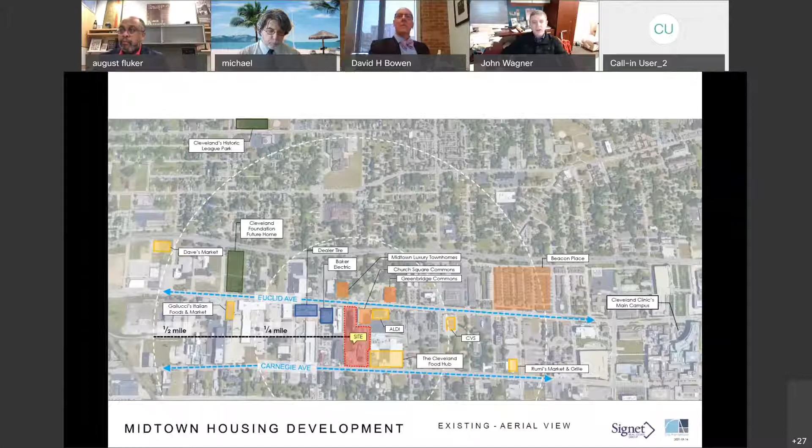This is an overall aerial. You'll see the site highlighted in red. There's a lot of great new stuff going on in Midtown, including the future home of the Cleveland Foundation. This site is located just east of Dick Pace's Baker Electric, and to the west of the Pearl Development Church Square Commons.

Here's an aerial of the site. On your right is Euclid Avenue. On the upper left is Carnegie.

Here you see the boundary of the site defined, as well as the 5 buildings that we are looking to demolish. I'm going to go through each one individually, but more focused on the Sullivan house, which is up on Euclid Avenue. I'd like to take a moment to talk about its siting and its relationship to Euclid. It's sort of awkwardly located in this missing tooth between Church Square Commons and Iron Mountain, which is the large complex just to the west of it, sitting in a sea of rubbled concrete.

At the request of Michael, we put together a quick diagram showing each of the buildings and the properties they're located on, just for purposes of your motions, so you can see which. There are numerous properties that will be consolidated in the future, but currently some of those buildings sit on 2 to 3 parcels.

So the Sullivan house, there is a group of folks that would like to save it. It is a historic home, and we feel strongly that while it does have intrinsic value, the site is better utilized based on the development plan we've come up with. We are not asking to demolish the Sullivan house today. We have spoken with Carl from Landmarks, with Jamie DeRosa, as well as some neighborhood stakeholders including Midtown, who are working currently on a plan to relocate the house.

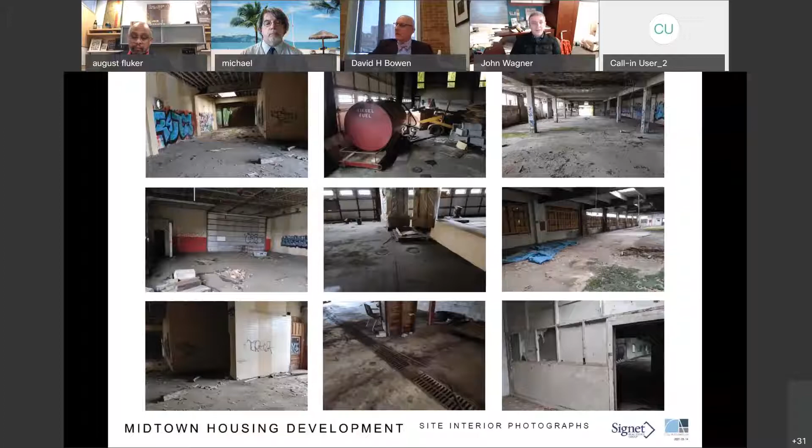Next slide shows the interior of those, very typical warehouse buildings, concrete slabs, steel and concrete frames, nothing of note in there other than a lot of dirt, debris, and unsafe conditions.

Next slide, please. So now we're going to talk about the redevelopment. The site is just under 6 acres. Again, Euclid Avenue is on the right, Carnegie Avenue is on the left.

At the top of the property is the Iron Mountain facility. And then on the lower portion, which would be to the east, we have the Church Square residence, as well as the Cleveland Food Hub and Aldi's. Next slide, please.

So the redevelopment looks to take advantage of this large property and the potential connections between Euclid Avenue and Carnegie. We are looking at a residential development in a two-phase approach. The first phase would be the buildings on the right, which are labeled buildings 1, 2, and 3. They amount to 160 residential units.

From a site and design standpoint, we felt it's important to line Euclid Avenue in that area of blue, which is residential amenity space, including fitness rooms, leasing, common lounge areas, as well as some actual leasable retail space right at the corner. The main design move we put in was a new street.

There is no connection north-south between 71st and 77th. We felt this was a great opportunity to create a new connection. This will be a private street, but it will be designed and function much like a public street with on-street parking, sidewalks, street trees, including an internal green space for the residents and a park-like setting. We have brought the buildings up to the street edge and tucked all of the parking behind.

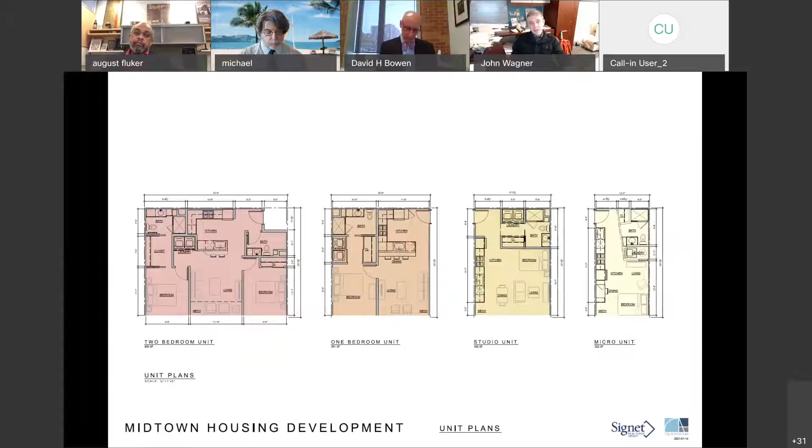They are put together in a series of 3-story walk-ups, with front doors on the street as well as access to parking from the rear. Each stair, or pod as we call it, will have 12 units. So you will get to know your neighbors really well, since 12 people share an entrance, sort of a neighborhood within the neighborhood.

As you go up the floor, we eliminate the extra hallway because you're up in the air, and we use that space to create larger units, the 1-bedrooms and 2-bedrooms. Each of those enter out into that single stair.

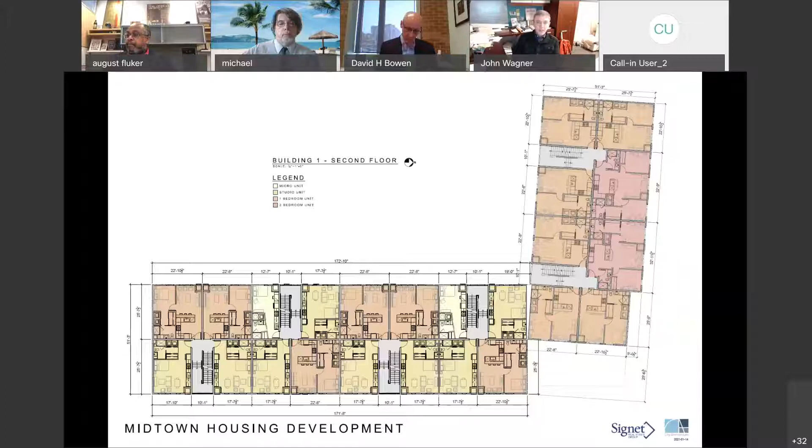From an architectural standpoint, we took a look at that missing type of design that was once very prevalent in Midtown. I'm thinking back to like the Knitting Mills building, the idea of these old warehouse buildings, and tried to incorporate that as well as add a mix of new and modern into the design elements.

So we have the L-shaped building with the retail and amenity space fronting Euclid. As you turn the corner into the new street, you can see the buildings and front doors lining the street with the on-street parking.

Currently we're looking at a mix of materials, and I'll get into those as we get to the elevations and perspectives of the building. There will be some variety between each of the buildings, but what you'll see in the perspectives is all based on the notion of red brick with charcoal. Keep in mind we will be making changes to each building as we develop the design further.

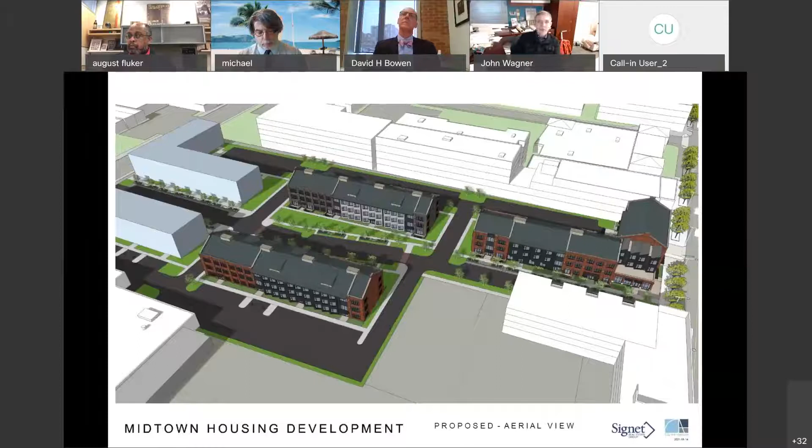And then we started to introduce these more modern elements made out of corrugated metal and larger casement style windows at the corner piece, as well as coming down the street.

We looked at those elements that were prevalent in these warehouses, and tried to be very strict in keeping with that style in the brick areas. We looked at ideas of sawtooth roofs and wanted to incorporate that, but use it in a modern way, which harkens to these townhome-looking pods that sit at the corner, as well as the bay windows.

I realize you guys can't see my mouse moving across the screen as I point to things -- the bay windows that go down the street, tucked under that eave line.

The backs of the buildings currently have the same design characteristics and materials. I bring this up because we are currently going through a budgeting pricing exercise. I always think projects are going to come in on budget, but contractors always tell me they're not. These are areas where we may have to reduce some masonry and introduce more metal, but currently we're looking to keep the design consistent all the way around. More to come when we come back for final design.

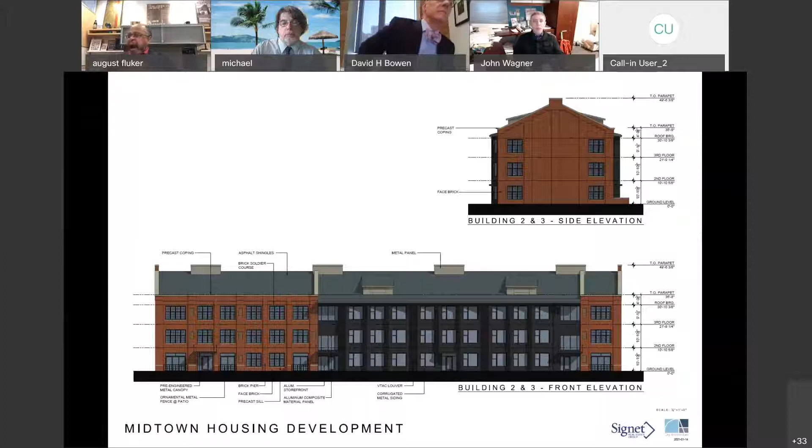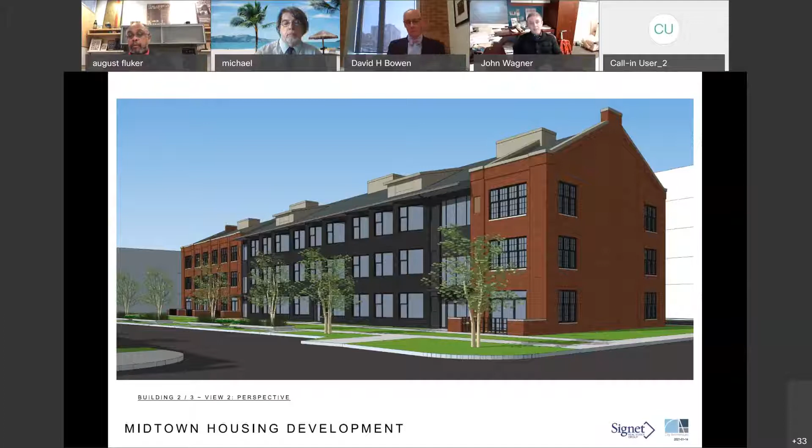The lower image is the area where we would like to cut this new street in. We think this will be a real benefit to the folks who live in Church Square, because they will be getting more landscaping, a tree-lined street, a sidewalk, as well as an animated streetscape right outside their windows. Next slide please.

So these are some images that are befores and afters of the Euclid Avenue frontage. The top one is existing, how it sits today, and the bottom one is the siting of the new proposed development as it would be in the future.

Next slide please. And then I'll stop here. This is the last image. This is again Euclid Avenue looking west at the intersection of Euclid and that new street with the retail and the plaza, and sort of the mix of traditional warehouse and modern architecture.

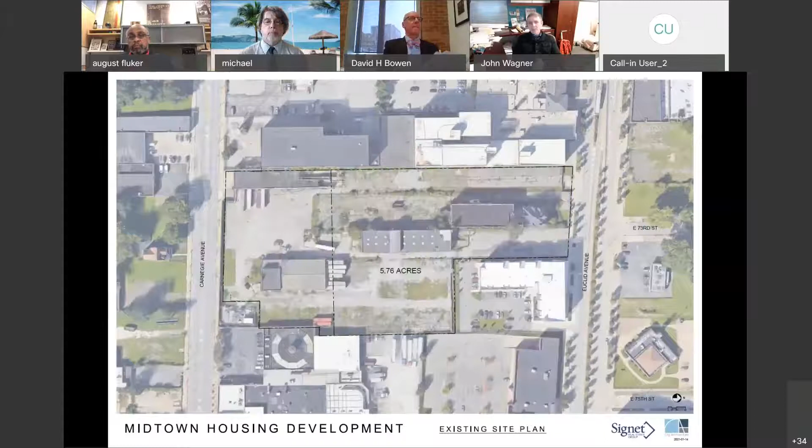Thank you. Hey John, since we got to go take these one by one, if you can go back to the images that show each one of the buildings so you can point out which one we're talking about at the time. Okay, I think the best place to go is the aerial at the beginning, maybe? Because I'm not 100% sure which building sits on which property, or which building is which agenda item. Okay, and I'll use the address and then you can show us which one it is.

Okay. Mr. Chairman, we do have Lillian with her hand raised. Next to the warehouse, and it is 7218 Euclid. So I believe that's the building that's the Alan Sullivan house with the warehouse behind it.

Okay, so it's the former 3-story commercial building. Hey Michael, if that's the Sullivan house, are we just doing the warehouse, or are we doing the commercial building too?

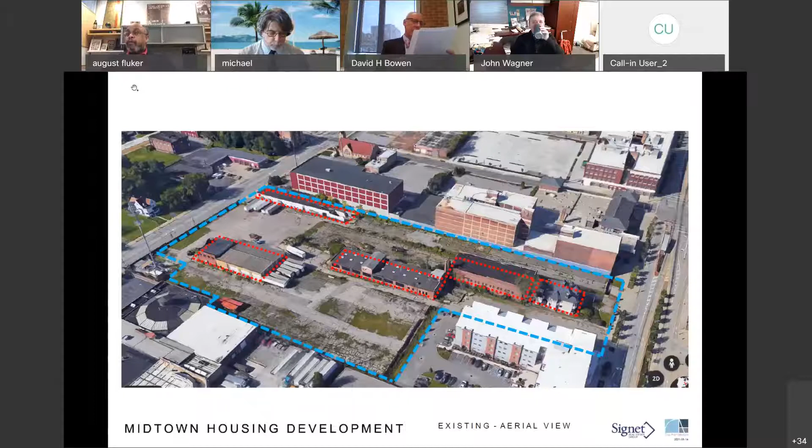I've put a note here on my notes excluding the Alan Sullivan house due to the presentation that Mr. Wagner gave. So I would say it's just the attached warehouse building on item number 1. Okay, so commission members, that would be with stated amendment, understanding it's not including, I guess it's 7218 Euclid, which is the Sullivan house.

So that's what I would look for in approval, excluding the Sullivan house. I move approval excluding the Sullivan house. Lillian has her hand raised, though.

I'll second that. I just - I think the project's great. I actually really like the direction of the architecture a lot. I think it's quite nice. My question is, as you head between here and final approval, for me, I would ask that if it's possible to consider in the site plan and the parking - and I understand since you're doing walk-ups and trying to keep the pricing down on these units for workforce housing, but it is a bit of a sea of parking. So is there a way to possibly work with the sewer district or others to have some partial components of the parking lot be permeable, and to really think about a combination of plaza and parking? Maybe it's not the whole thing for cost purposes.

But since it's garden style amongst parking, it also could potentially feel more like a place than buildings sitting in a parking lot. So I love the project. I just wanted to ask that maybe you do some further consideration of how this large site can also be a place, with thinking about that. And I second the demolition.

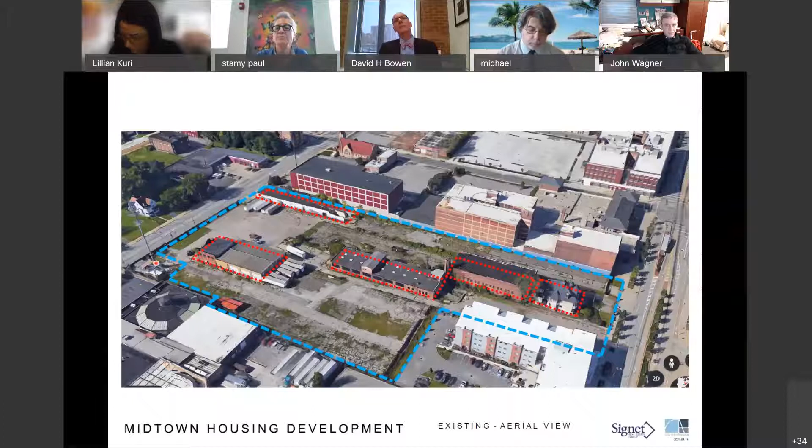Yes, I move approval. Second. We have a motion and a second. Further discussion. Call the roll, please. Bowen, yes. Downing... Diane, yes. Kuri, yes. Paul, yes.

Motion carries. The next one is a proposed demolition of a one-story warehouse building with an attached office area. This is parcel 118-15-014. It's the lower left.

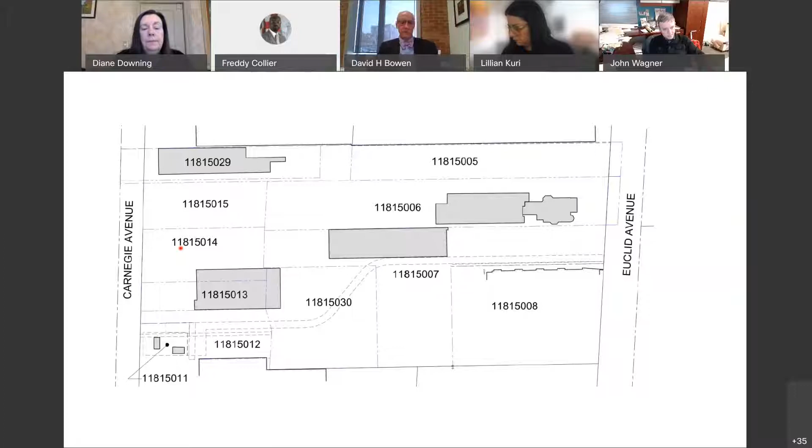Yeah, I move approval. Second. Motion second, further discussion. Call the roll, please. Bowen, yes. Downing, yes. Kuri, yes. Paul, yes.

Motion carries. The next one is the schematic design approval. So this is for schematic.

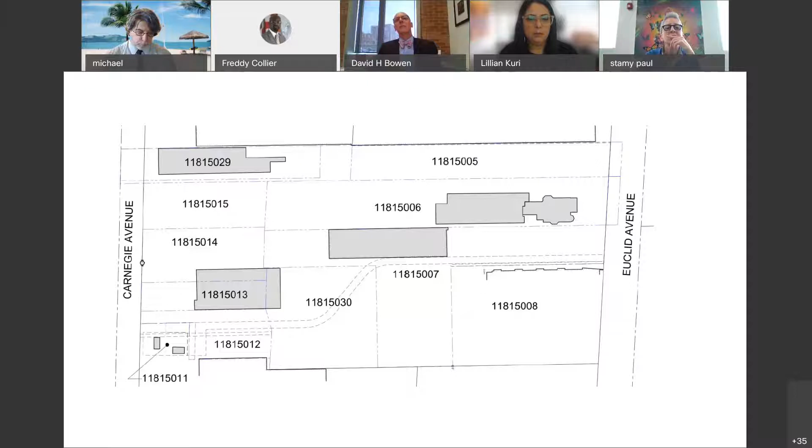I'll move approval, but with my comment that they explore the site plan a little bit from kind of looking at stormwater and different methods for making the parking lot, addressing some of the quantity of asphalt.

Okay, I'll second it, but just want to make sure it continues to exclude the Allen House. Gotcha, thank you. So we have a motion and a second. Further discussion. Call the roll, please. Bowen, yes. Downing, yes. Curry, yes. Stamy, yes.

Motion carries. Lot consolidation, lot split, permanent parcel number 007-07-155. Who's here for this? This is at 3525 Siam Avenue.

Looks like we have Byron from Cleveland Bricks. Byron, are you on the line? Yes, I'm on the line. All right, go ahead, please. Okay, so thank you, commissioners, first of all.

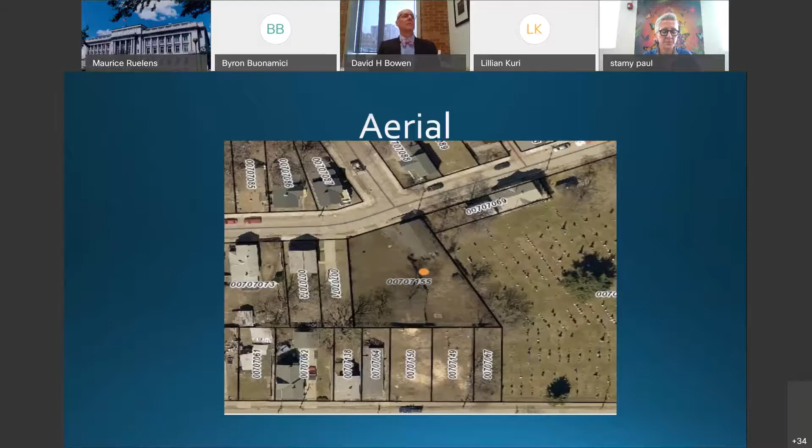We have a parcel, a large parcel next to the cemetery over on the corner of Siam Avenue and Japan Court. Right now it's a rather large lot, as you can see, with a single house on it, kind of tucked up there in the corner that's currently in use. So if we could go to the next slide, I don't know how easy it is for everybody to see that.

Is it possible to zoom in? No, I can't really zoom in easily. I can see it though. Everybody, if you want to zoom in personally, there should be a bar on the left-hand side of your screen that will allow you to zoom in anywhere you want on the screen. Okay.

All right, so it's our proposal for 3 additional houses back there. As you can see on the left, where it says parcel C4, is a north-south facing house with the frontage on Siam. The parcel C3 is kind of a horizontal style house, and C2 is the same style house, just facing a slightly different direction. Our goal is that there's also going to be a single car garage added to the existing house.

They're all going to have access from the same motor court, as you can see there, kind of outlined in the green line. I have a better drawing later in the presentation. I think you can go to the next slide. So this is the design for the rear houses.

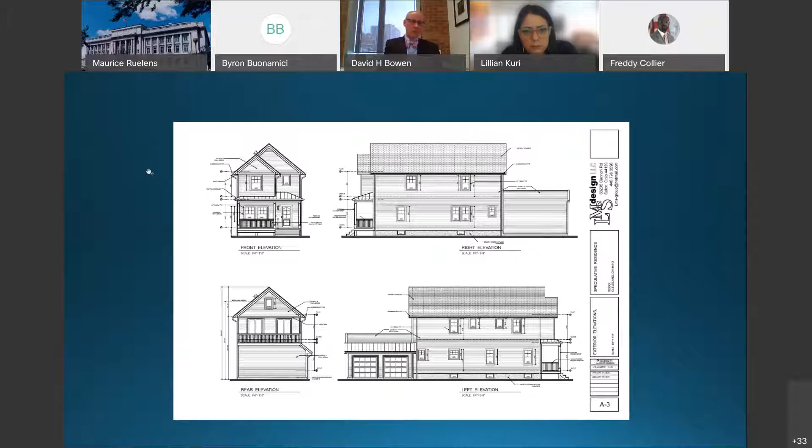This is the frontage of the house that's going to be off of Siam. Pretty basic, I think. Again, it just differs from the others in that the front is the narrow end of the house instead of the wide. You can go to the next slide.

And just more floor plan, and you can go to the next slide, please.

And then those 2 houses will be in the back, and then there are some plans for a little bit of private green space. The layout of the houses was planned so that there is a little bit of green space available. You can go to the next slide.

I mean, it could kind of help, creating some topics for discussion.

I'm sorry, I couldn't hear anything. Somebody was talking to me. I think that was just background chatter.

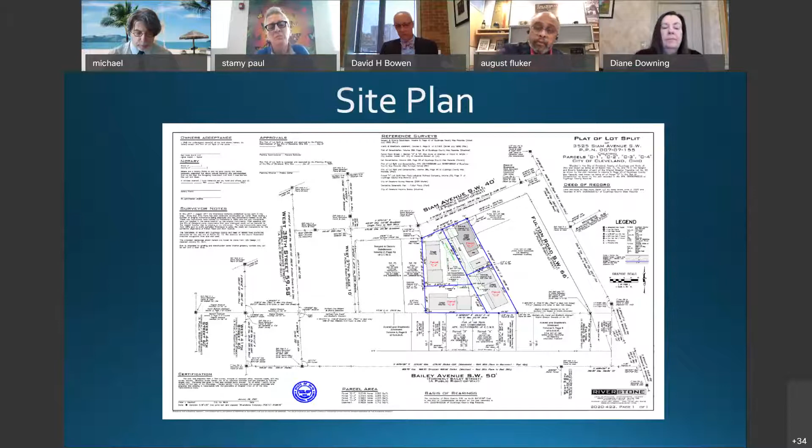Call the roll please. Bowen, yes. Downing, yes. Fluker. Sorry, August, I didn't hear you. Yes. Okay, thank you. Kuri, yes. Paul, yes.

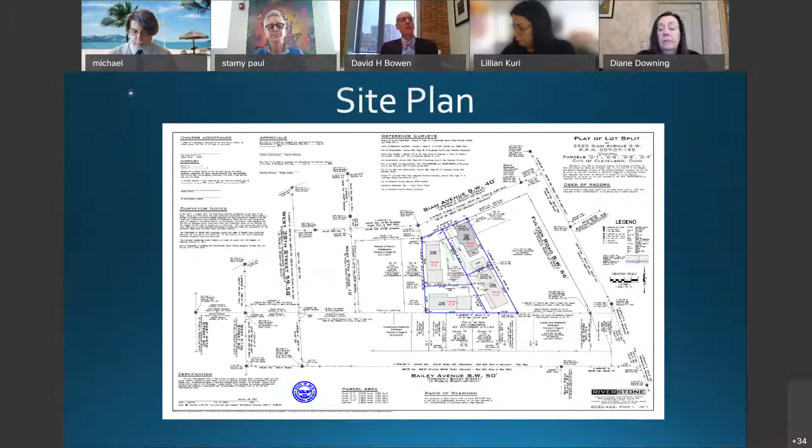Okay, motion carries. We'll see you in two weeks. Please get everything together so we have a better understanding of the context. And if you have any questions, you can reach out to staff and they can help you with that.

Okay, the permanent parcel number 00926-019. This is 4527 Broadview Road. Who's here for this one, please? Rick Bucklow. All right, go ahead. Jeff Rusby from OBCDC as well.

Okay, what I'm looking to do here is there's two buildings on one parcel. What I'd like to do is just split them in two and off the front part and keep the back. I'm an interior remodeler, and I'd just like to keep the building for my own personal property, leftover material and the car lift in there, just do my own little maintenance and storage.

So which building are you keeping and which building are you selling? This back building is the one you're keeping? The 4527, the building in the front, I would like to sell, and then the one in the back is the one I'd like to keep. Okay, great. And they both have street access to parking? Yes.

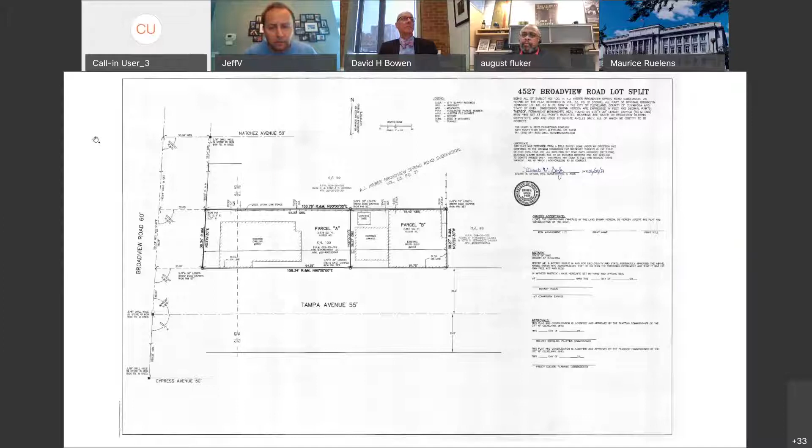It's a use that is non-conforming with the rest of the residential uses surrounding it. Furthermore, we've had a variety of complaints from surrounding neighbors going on a few months now, including to the Department of Building and Housing regarding the use. We would object to it. We'd be happy to meet with the property owner, try to get in touch with the property owner unsuccessfully. We'd be happy to meet with the property owner, but as it stands, as it's presented, we would object to it. So it's not zoned properly for his use, so he wouldn't be able to get an occupancy.

Is basically what you're saying. Correct. Mr. Chairman, we also have Molly. Mr. Chairman, I'm a little confused. So the use doesn't exist now? I'm not clear about, or does it exist?

You have exception to that it exists. I'm not sure what your point is, Jeff. I believe Molly Farris from Councilman Brancatelli's office might be able to confirm. I believe it is zoned local retail or limited local retail, which would not allow the kind of repair work that's happening in the property.

So it's a non-conforming use currently. And it has nothing to do with the lot split. I'm trying to understand this, I guess. That is my understanding, yes. Okay, thank you. I just need to understand.

Yeah, so we're not approving or disapproving use. We're approving or disapproving a lot split. So if they have a use that's not allowed, we don't know if it's grandfathered in or not. That's not in front of our board right now, and it's not under our purview.

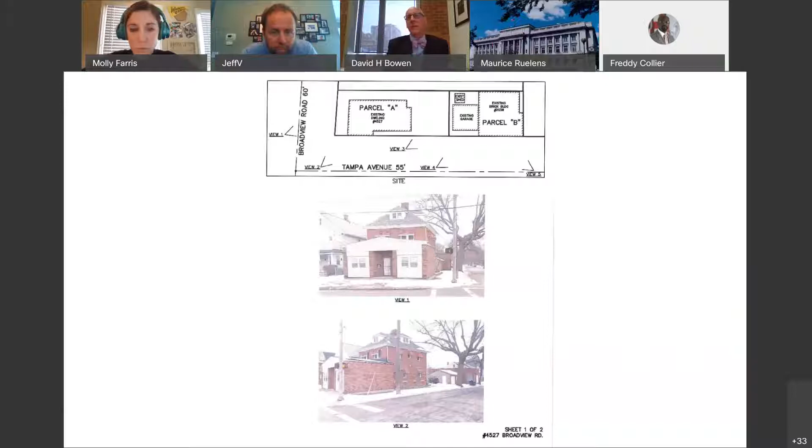Since we can discuss this, I want to say my preference would be to table this, and have the councilman and the applicant meet and come back. I'm going to vote no because I'd like them to come back, so my preference is to table. I'm in the same mindset as Lillian as far as tabling it, but I'll vote no as well because I'd like to see that conversation happen first.

I know, but we're conflating two different situations here. I don't think, legally, we have the right to do that, but that's just my opinion. I do think we do have the right to, on a lot split, because we have to evaluate the overall proposal—we do it all the time. So anyway, let's vote.

But the reality of it is the use exists. Whether it's split or not is irrelevant. So I'm going to call the question. Sure, Michael, call the roll please. Bowen, yes. Downing, yes. Fluker, yes. Kuri, no. Paul, no. Motion carries. The lot split has been approved.

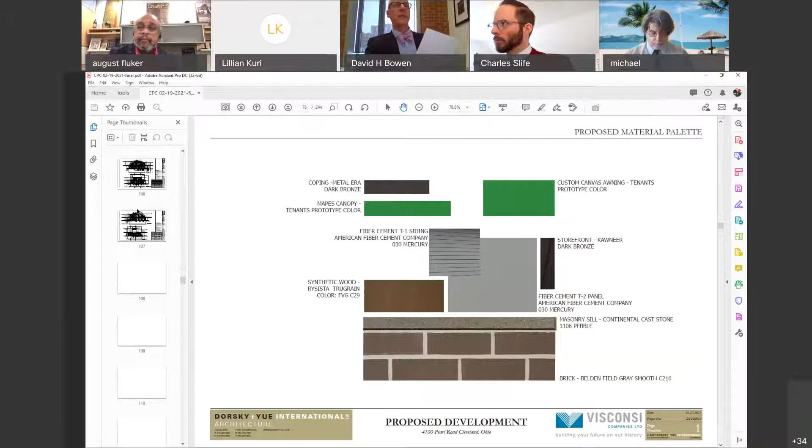Who's here to present this? I need to recuse.

Krysta, are you on mute? I am, I'm here. Okay. Are you the only one presenting? I also have with me today Denise Van Leer, the Executive Director of Fairfax Renaissance Development Corporation. And I believe our developers from McCormack Baron Salazar may also be on the call. I'm not sure if they're actually on the call yet or not, but...

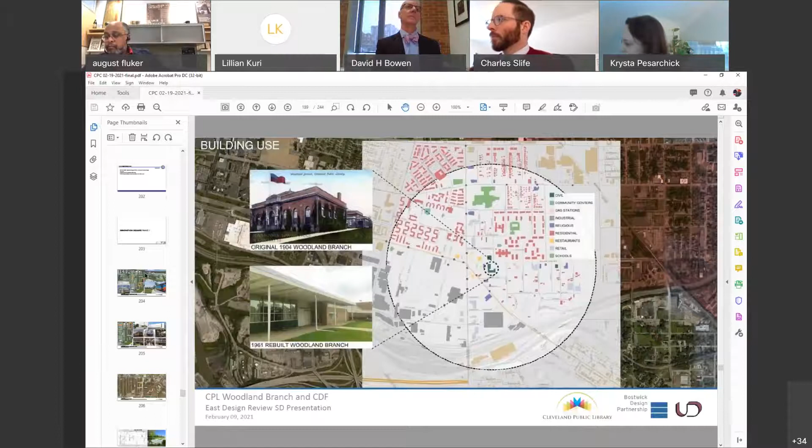Okay, can anyone speaking raise your right hand? Do you solemnly swear to tell the truth, the whole truth, and nothing but the truth, as you shall answer under penalty of perjury? I do. Right, thanks, go ahead.

Okay, so here we are looking at, I just wanted to give everybody a refresh and some background on the greater neighborhood here, to give you some context. A couple of years ago, we worked with Denise to put together a master plan for this end of the Fairfax neighborhood. It is bounded by Cedar Avenue to the north, Quincy to the south, East 105th Street Opportunity Corridor on the east, and tooths into the neighborhood till around East 97th, East 95th Street. Again, this was a couple of years ago.

We put together this master plan, and this board had adopted it at the time. So I just wanted to provide a refresher and provide the context to outline where we are putting our first phase in the ground.

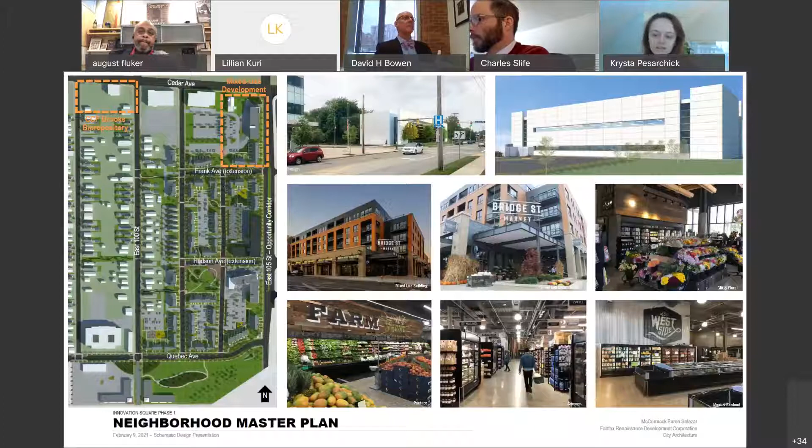So next slide. Here we're zooming into our postage stamp of the site. North is to your right. This is the existing conditions. You can see all the structures that were here previously have since been demolished. There is just some trees, some scrub brush. The two images are looking from East 105th towards the northwest at what will be the most prominent corner of this building. Currently, there's nothing there.

And I did neglect to mention on the previous slide, but there is Hudson Avenue, which is a city project. They are extending that through. Currently, it exists east of 105th, but it will be extending west into the neighborhood. You can see there, Hudson Avenue and Frank are proposed extensions that are working with city engineering now. So those are slated to come online in the next year or two.

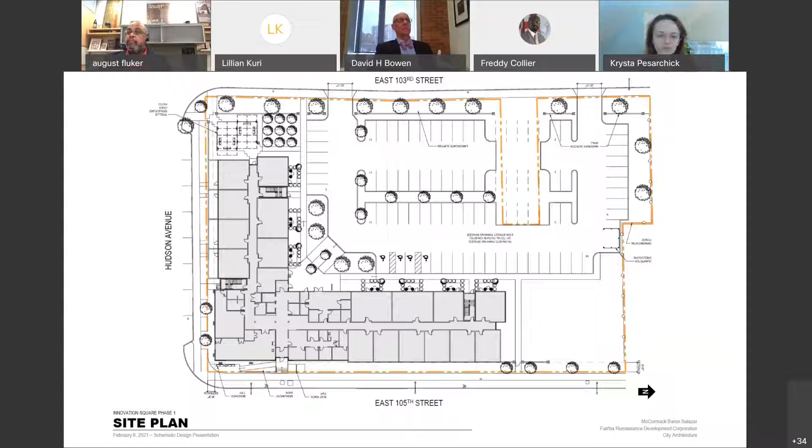So continuing, again, we are working to adopt some additional zoning that'll provide an urban form overlay in this part of the neighborhood to really beef up that frontage on East 105th, that opportunity corridor. And so you can see that we've got the building on Hudson and 105th. We have the parking pushed to the rear.

It is an 82 unit apartment building. It is 4 stories on East 105th Street, and 3 stories on Hudson Avenue. Our goal is to help provide that transition back into the neighborhood from higher density, transitioning down into lower density housing that already exists in parts of the neighborhood.

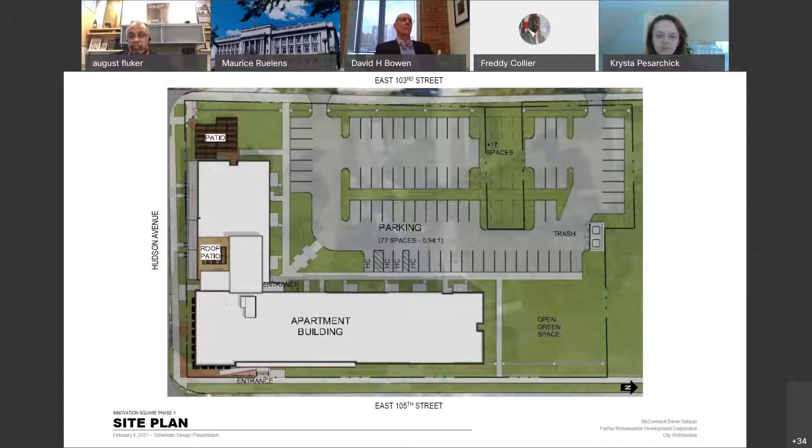From the next slide, you'll see that we've got our schematic landscape plan. The one thing I would like to point out is that we are no longer proposing trees on the tree lawn of East 105th Street. That is a utility zone, the trees just won't grow there. So we will be removing those in the next iteration of this plan.

But as you can see, we intend to do a lot of dense landscaping. The developer has demonstrated in the past with other properties around the country the desire to have this look very soft, very welcoming, very well maintained. So that is the intent here with our landscaping approach, with a lot of trees and lush shrubbery and grasses. If you go to the next slide, you'll see a sample palette of what we are thinking for this area, all native species, salt tolerant where appropriate.

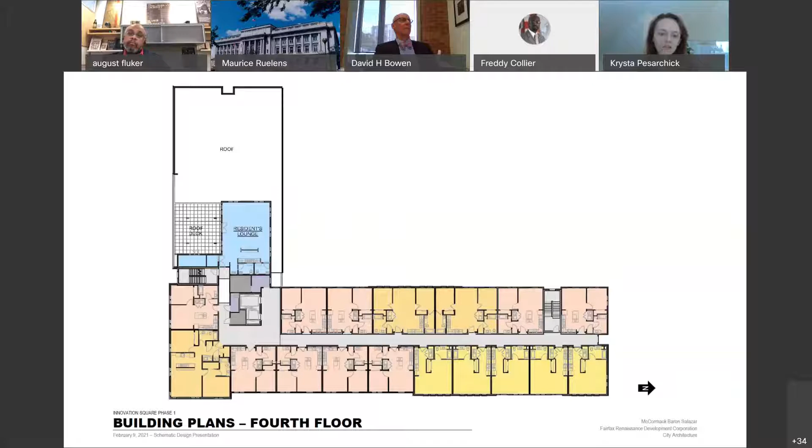We have a mix of studio, 1-bedroom and 2-bedroom units in the building. There's a special larger unit that happens at the corner of the building, which will make sense when you look at the elevations in some upcoming slides. One thing we wanted to note is that a value very important to the developer is universal design, so we are incorporating many of those features into the units themselves, as well as the greater building. Just wanted to point that out. Next slide.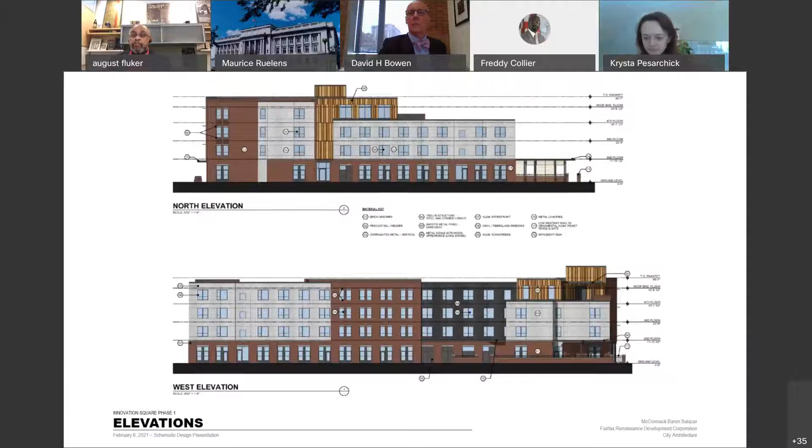Next slide, please. And here you have our winning view, if you will, of what this will look like when it all comes together and those new streets are constructed - the new Hudson extension and how this all comes together and presents itself.

And I think that about does it. Thank you. That's my presentation.

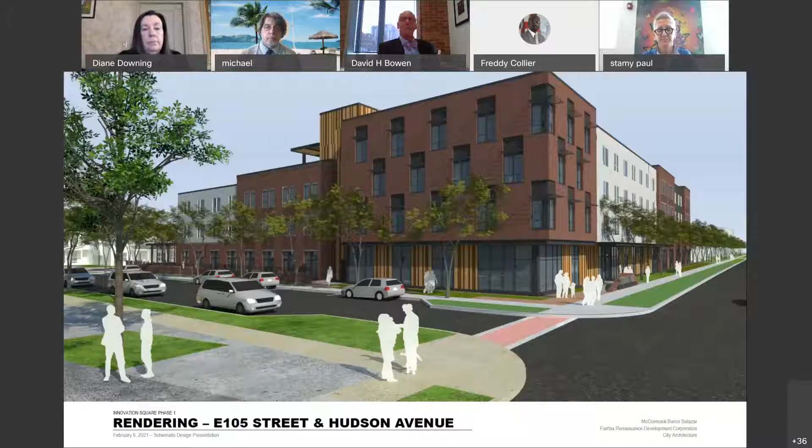Okay, thank you. Oh, there it is. I heard him say that. Motion carries. Thank you very much. Good luck. Thank you all.

Thank you. So we go back to the bank building, new construction. This is at 4106 Pearl Road. Who's here for this?

Thank you, Mr. Chairman. My name is Jeff Cossel with Visconsi Companies. I also have with me Jeff Deeds, who's our VP of Development.

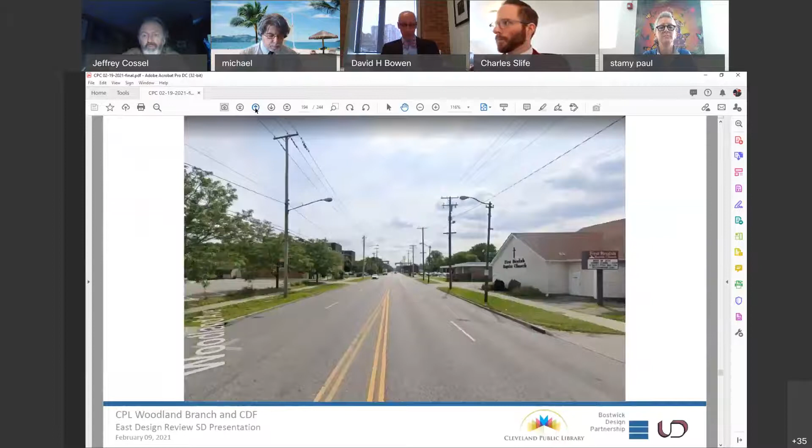Okay, Jeff, and good morning. Please raise your right hand. Do you solemnly swear to tell the truth, the whole truth, and nothing but the truth, under the penalty of perjury? Yes, I do. Thank you. Well, as soon as we get your PowerPoint presentation, you can start.

Okay, thank you, Mr. Chairman. For those of you that may not have seen our submission package, this is the property at 4106 Pearl Road at Henninger. It's the northwest quadrant of that intersection, just south of Wildlife Way that drops down into the zoo's main entrance. Included in our submission package were some photos, both aerial and street level view, to show the existing conditions. The parcel is presently occupied by Eagle Auto Service.

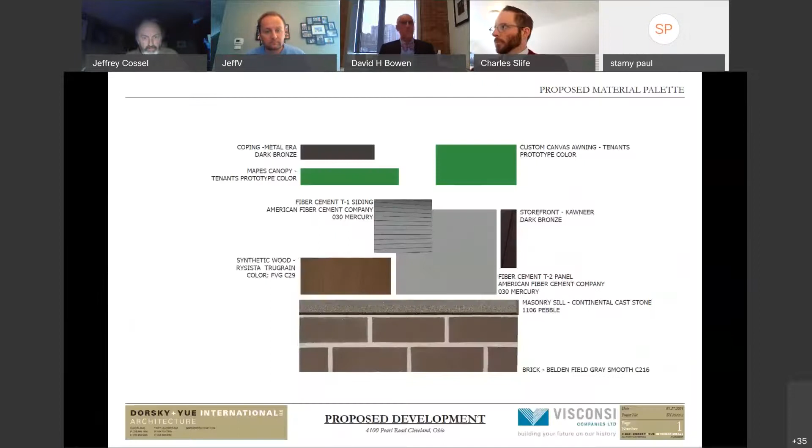I'm not seeing it in these slides - I don't see the aerials or the photograph in this presentation, sorry about that. Eagle Auto Service is a very old building, and to be honest, I'm not sure they're actually doing auto repairs anymore. It's a little poorly maintained, weeds overgrowing the site, that type of thing. We are looking to come in, demolish that building, and put in a 2,200 square foot bank on just under half an acre of property there.

We have worked closely with planning staff, as well as the design review advisory committee and Old Brooklyn CDC, to make refinements to the plan as we went through the process. What you have in front of you is the result of those refinements, and we think it's a very good overall plan, with the bank up tight to the street to allow for pedestrian access, parking positioned to the rear, west of the building.

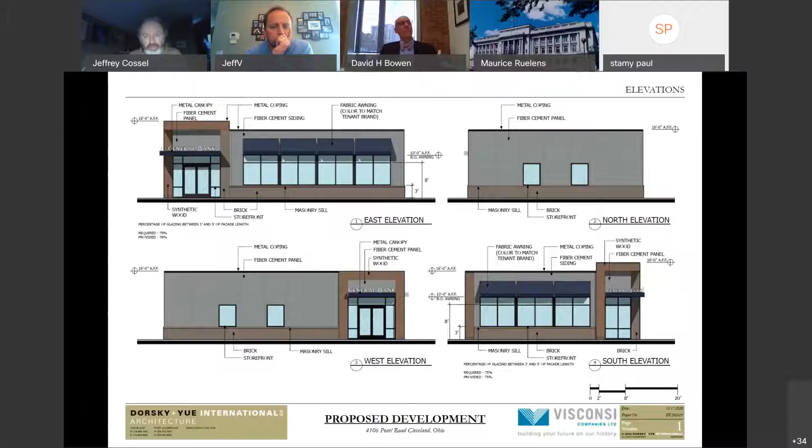There is some additional information in the package with regard to landscape design, site lighting, and other background for the Planning Commission members. We're here to ask for your approval and to answer any questions the Commission members may have.

Move approval. Second. We have a motion and a second. Further discussion? Call the roll, Michael. Bowen, yes. Downing, yes. Fluker, yes. Hall. Motion carries. Good luck to you.

Thank you for the presentation. Thank you, Mr. Chairman, and thank you for the board members.

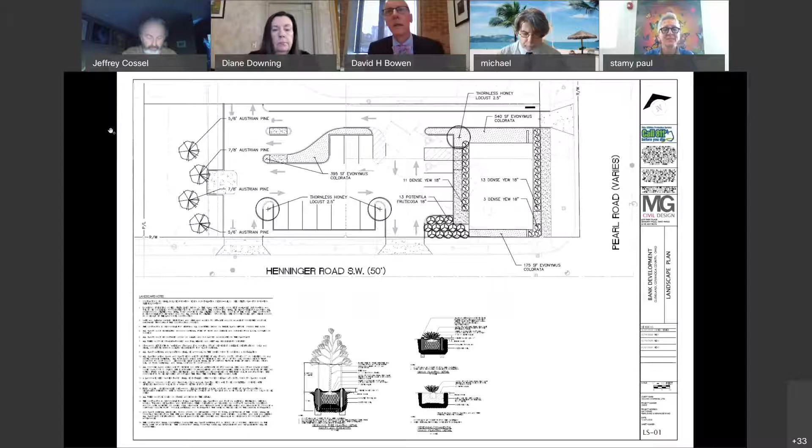Mr. Chairman, I did not finish the votes. I need to hear from Stamy Paul, and Councilmember Slife. Thank you, yes, for Stamy. And Councilman Slife? Thank you. I could see it, I couldn't hear. I know it's getting tough to hear on some of these. Yep, thank you. Okay, well, it passed.

Thank you very much. Super. Thank you. The next is Urban Community School Office Building. This is at 2050 West 47th Street. Who's here for this one?

Hi, Mr. Bowen. My name is Tom Gill, the president here at Urban. And I'm joined by John Haggerty, who's here at Urban, as well as our Director of Ops, Hanna Cohan from Knez, and Rick Siegfried from RSA Architects. Okay, great. If everyone could raise your right hand.

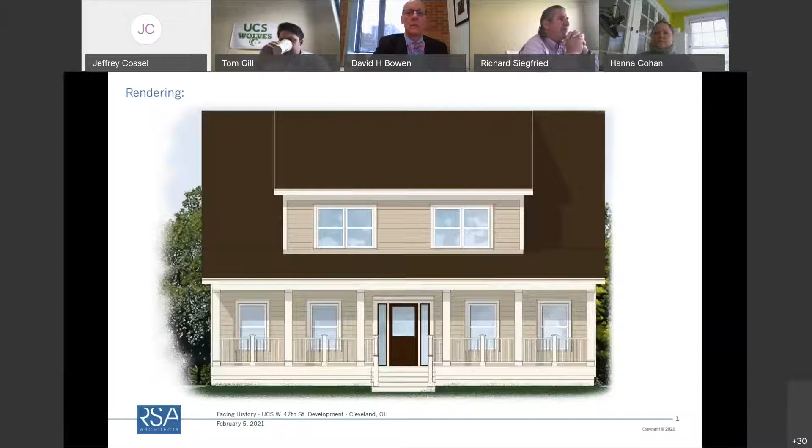Front elevations, again pretty typically residential. Nice porch, addresses the street. Relatively simple in architecture, but we think the size and scale is appropriate for what we're doing here. Go to the next page if you could.

But again, I know it's your purview. Just look through the rest of the drawings and we'll answer any questions, receive any comments, or go on and look at the next one.

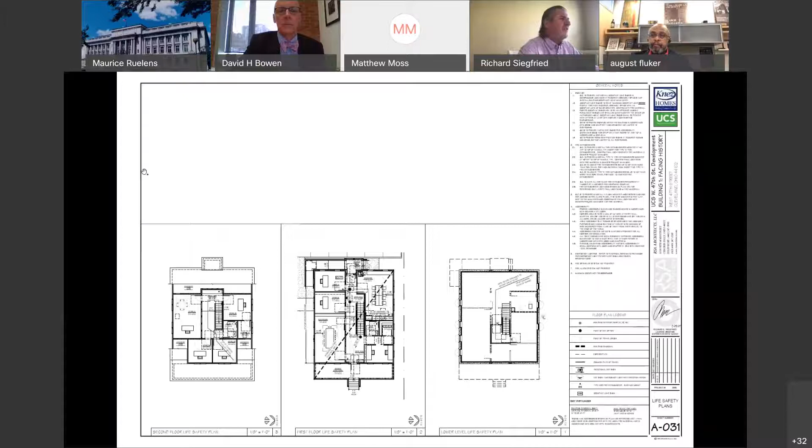Sometimes, and we agreed, we studied it pretty hard. I appreciate it. Yeah, the dedicated parking's in the back, and it's the easiest access into the building. So, yeah. Okay. Are you going to do these one at a time, or do you want to look at them both?

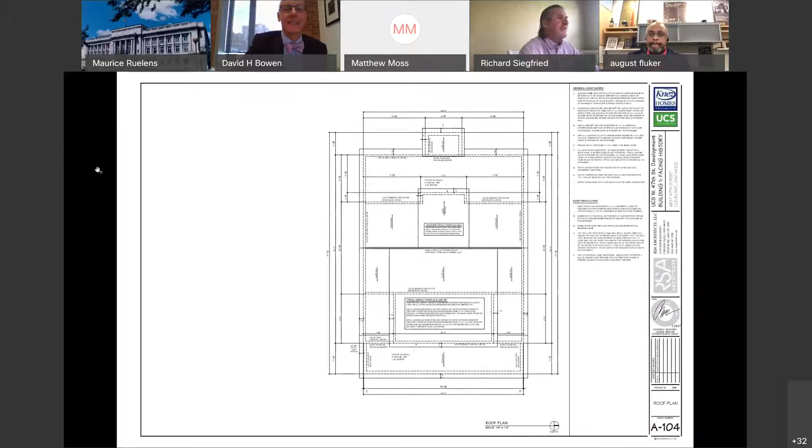Boy, you got a lot of detailed drawings in here. Right, yeah, well, we're getting ready to build off of them. Gotcha. More than you typically see if you're the first submittal, but I guess we got a little confident. That's okay. Well, plus, the people at Knez, they needed to be able to price these things and make sure we were in the right place. And they're not, we just kept running.

Yeah, so they're in the back left corner of the top. We just look at the left side elevation. You can see that ramp, and you can see that our grade is actually sloping down toward the sidewalk. So it's also steeper in the front. We'd have more stairs, it'd be a longer ramp.

Yeah, we make every attempt to pay attention to side elevations in the rear as well as the front and back, so we get 360-degree architecture that fits in the neighborhood and kind of creates its own little subzone there. And we're anxious to get moving.

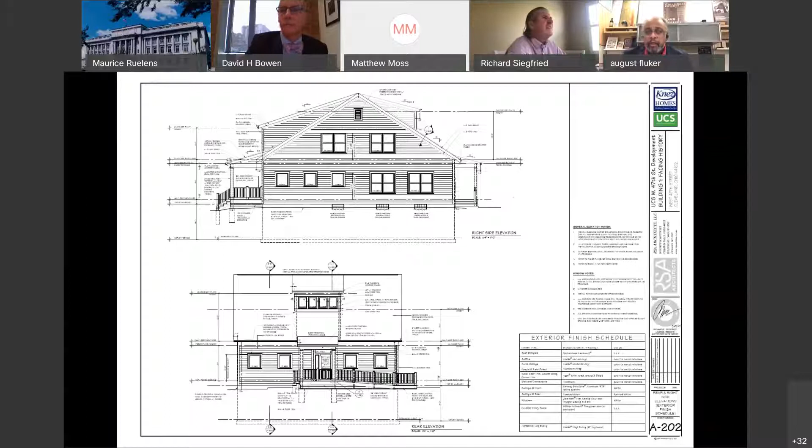On this, and this is just a question to the applicant. August, I mean, obviously you chose to make these homes, and obviously you've created, I believe, some challenges, because right now you have these separate homes, which are banks of different offices. So if, again, I'm going back to, if I'm physically challenged, I have to go out the back, go down a ramp, traverse across, go back up another ramp. You know, if I have to go to another office, again, I'm just trying to point out, you created this situation, it's not like you inherited it. So I'm just pointing that out only because I think in this day and age of trying to be inclusive, we have to think about folks of all capabilities.

Right, and so we certainly appreciate your comments and understand it. The functions of these buildings are such that it would be relatively unusual for someone to be going from one to the other, because they're such, again, it's really good work, but they're pretty diverse tasks that are happening in each one of them.

And it was an effort to create that environment and that characteristic on the street on 47th that drove us to the residential style buildings.

I'm gonna be honest with you. Why don't you just create one continuous veranda and be done with it? We have to get into some code issues with our type 5B construction.

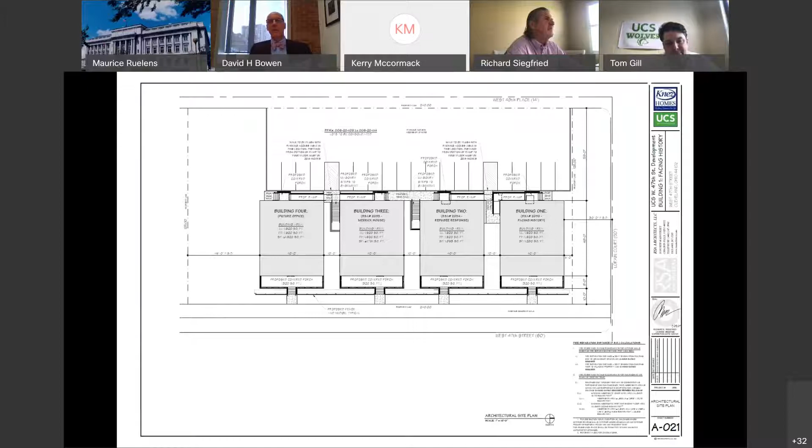Michael, call the roll, please. Bowen, yes. Downing. Fluker, yes. Curry, yes. Sorry, Scott, I couldn't hear you. Yes. Thank you. Yes. Okay, motion carries.

Now this is for the Urban Community School office building number 2, seeking final approval. I move approval, Downing.

Second, Floyd. Sorry, we haven't seen that presentation yet, commissioners. Had indicated that these 4 buildings are building 1, I thought. Well, maybe, okay, but there's another presentation for building 2 then. Oh, because the presentation showed 2 buildings in it. Right, but I believe there's another presentation following this one that gives the details on that building.

Right, and for the record, we should probably look at it. Oh, we won't go long, we won't spend a lot of time. Don't spend a lot of time. All right, stop you. Okay, Michael, if you could flip through to the next presentation, and I think we just kind of need to, we'll see it.

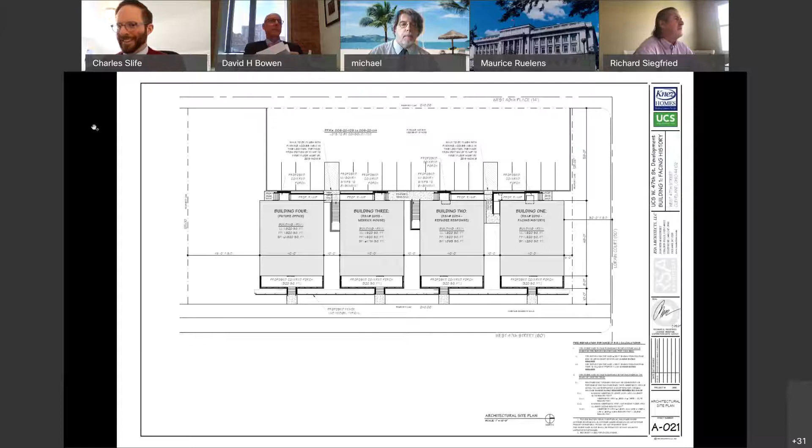Someone needs better internet access. I would do it if I could. Sorry, was I supposed to change the slide? Yes, please, move through. Like if you could, yeah.

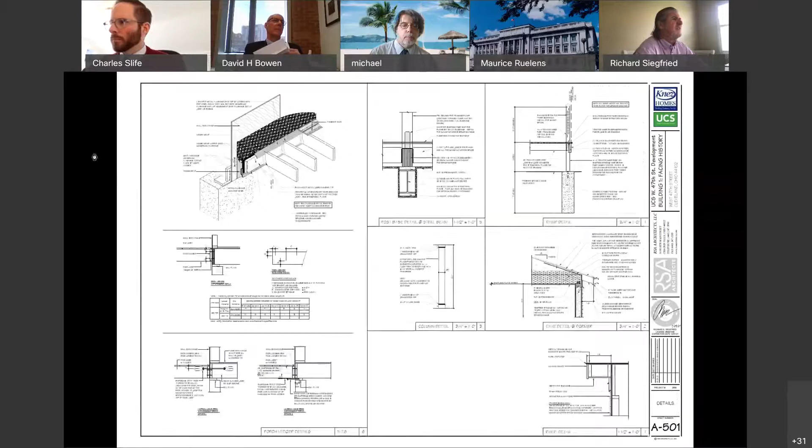You may have it loaded as a separate PDF. That's all I have, there it is right there. That's building number 2, and then the presentation follows. Gotcha.

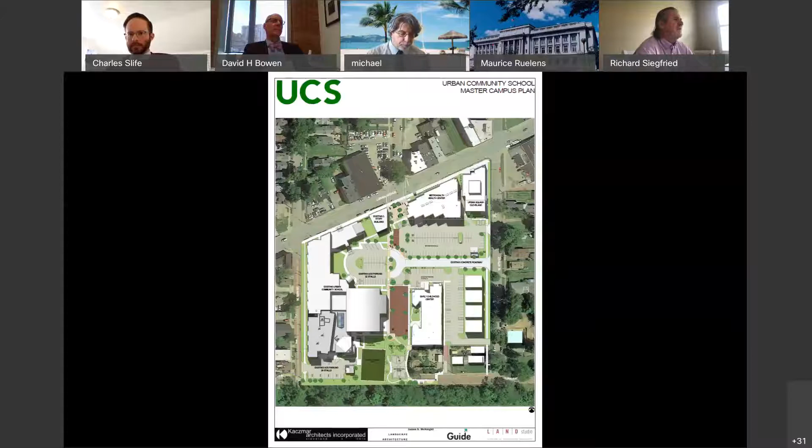Okay, so the same site information is obviously applicable, same context. This is the building just to the south - this is the refugee response. Same residential feel, different color, still got the porch, the interaction with the street. There's our color palette again, we're keeping it pretty clean and simple.

So just so you know what you're looking at, in building 2 you'll see the ramp. This one isn't quite as far out of the ground, so the ramp is able to be shorter and the location of the back door moved. But there's a stairway down to the basement - that's what that is on the left side. That's because they have a lot of garden implements and such going in and out of the building, and we don't want to take them through the front door. So that's a basement stairway there.

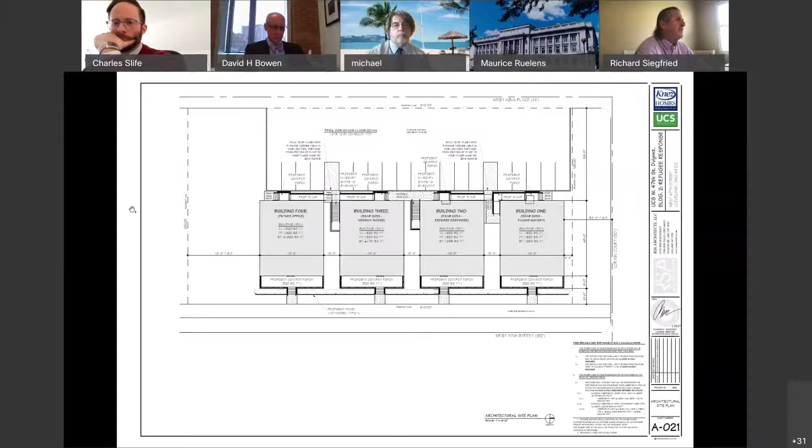Okay, you can just kind of clip through them, I guess. Anybody have any questions as we go?

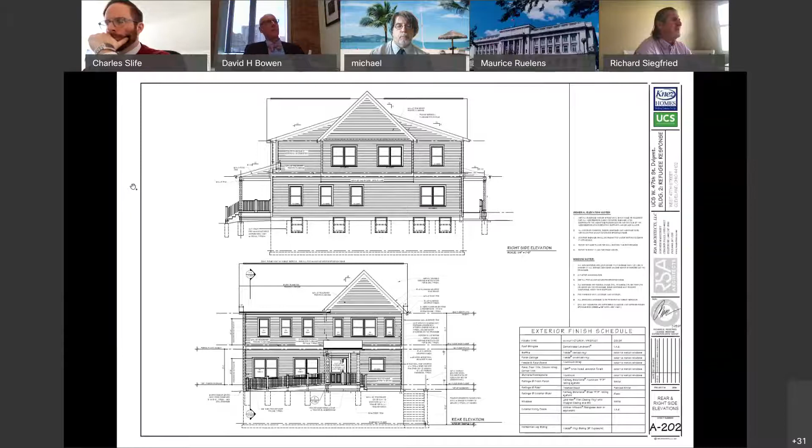Probably way more than you wanted to know about the building, right? Okay, I move to approve building cluster number 2 as presented. Second, Paul. Motion seconded, further discussion?

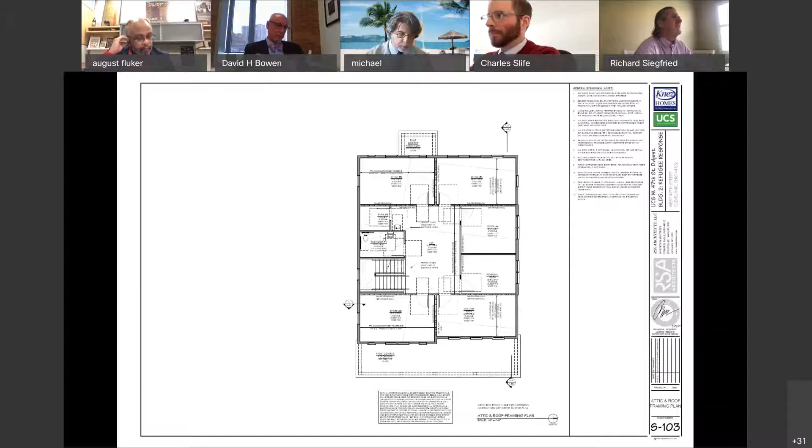Roll call. Michael? Bowen, yes. Downing, yes. Fluker, yes. Curry, yes. Paul, yes. Aye. Motion carries.

Good luck, thank you all very much. Appreciate your time this morning. Thanks everybody, be well. Thank you. Looking forward to those cookies. All right.

East Design Review. This is for the Woodland Branch Library, Central Distribution Facility, new construction. This is at 5802 Woodland Avenue. This is seeking final approval here.

Who's here for this? Mr. Chairman... Before you begin, this is Diane Downing. I'm going to abstain - my husband, Tom Corrigan, is on the board of the library. Thank you, thank you, thank you. This is Dan Polak with Bostwick Design.

Hey Dan, how are you? Is there anyone else besides you? We have others on the call. I will be doing the presentation though. We have Kat Sonhalter from the library and others from the team. Can you raise your right hand? Do you solemnly swear to tell the truth, the whole truth, and nothing but the truth as you shall answer under the penalty of perjury? I do. Great, go ahead.

So last time we presented, we received conceptual approval from East Design. We came here and the comment was made that you guys didn't need to see us until final. We did go back to East Design review with our schematic and got final approval. I think the reason we got final is because we were able to answer their questions and move forward accordingly. This presentation is formulated to highlight the updates and the big picture of the buildings. If we want to look at any site context, that's towards the back and we can review that if needed. Next slide, please.

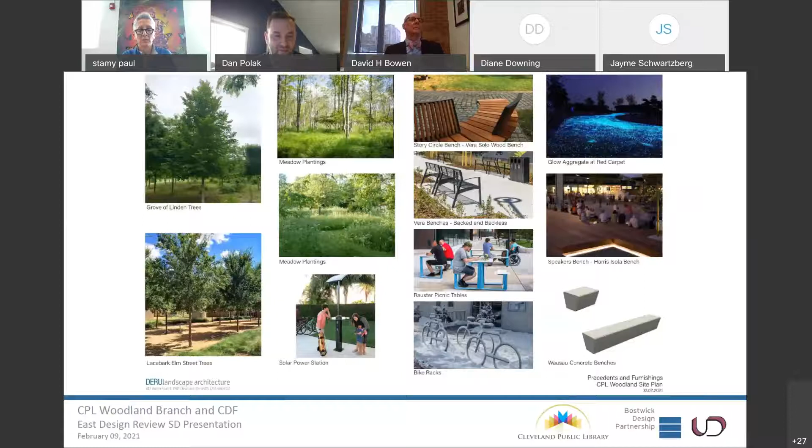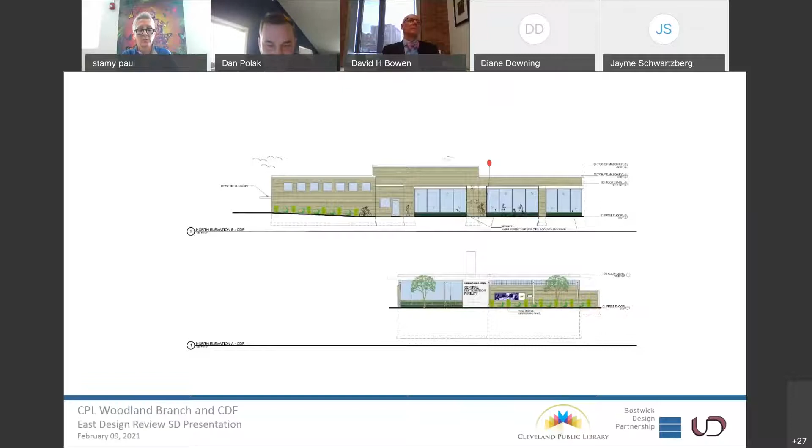Next page. Again, this building is existing. We are adding a new dock on that top elevation to the left side of it, which will match the one currently there to the right. Otherwise, we're infilling the existing garage doors on that top elevation with a new storefront system to match the rest of the building, creating nice views in and out and also bringing light into that space for the staff and for the people on that site.

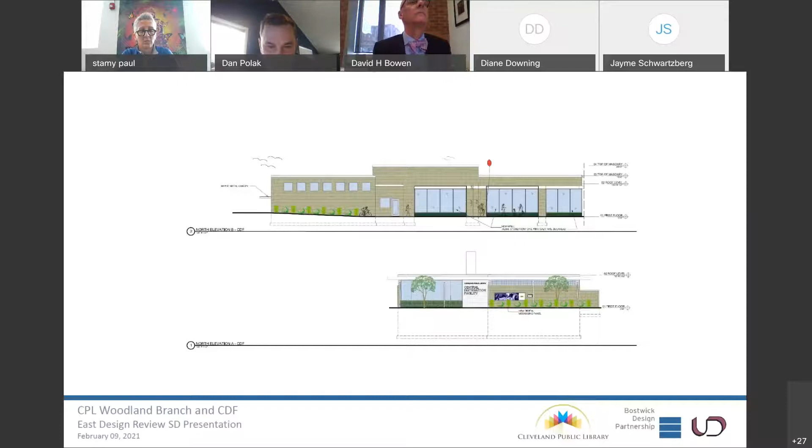Next slide. So this is the branch floor plan. It's pretty simple in a lot of ways. We've tried to provide as much space as possible for patrons and for education, reading, children's activities, and adult educational opportunities, as well as the main book stack areas. We also have meeting rooms to the right, which can be used for different reasons, whether study rooms or family meetings. The large community room to the bottom left will be accessible day and night and available to be reserved by the community as well. Next slide, please.

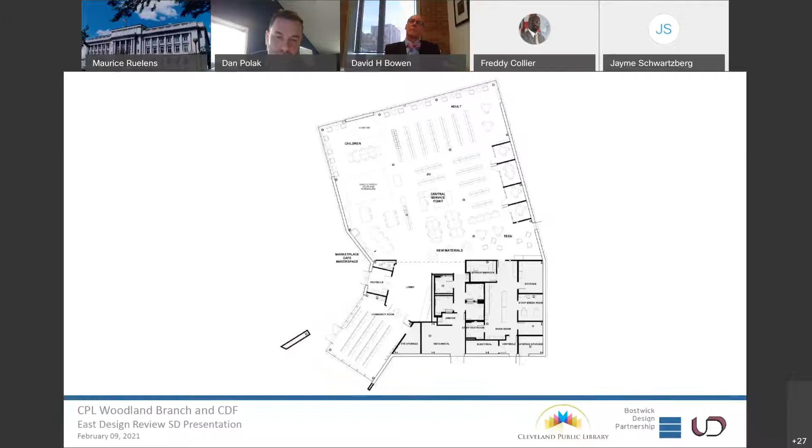Yeah, I just wanted to comment really quick with respect to that interior space. If you go back to that interior space, it's outdoor space, but it's within the interior area of the building. I don't know what the budget is, but given that space is intended to be leveraged or utilized, could there be something more interesting done with that courtyard space, rather than it just being a series of walkways to get you from one door to the next, and it's very flat? I'm just curious, has any thought been given to that? If you can go back to the image, I think it will help solidify what I'm saying here.

Yeah, I think that's a great question, and this image probably doesn't do justice to the full landscape plan. So try to keep this one in your head, and let's go back to, it might have been the 4th or 5th slide of the presentation. So if we could keep going back.

Right here, yeah, so we are infilling that area with a grove of trees to create something nice in this area. We also have picnic tables, you can kind of see it under the trees. There's a story circle, so our intent here is again, anyone can use this space, but it gives a nice, comfortable shaded area away from the street for the library to take advantage of a children's story area, and also potential other outdoor learning opportunities in that space.

We do have in the center, off of that red carpet, it's labeled as the speaker's bench. So the idea is we would put presentations and things out front and center to the community. These other areas would be available to sit and observe those things and take some respite from the sun on a bright day, and also kind of be protected in that area. I don't know if I answered your question fully there, but Freddy, did that answer your question?

Yes, that's fair. And I saw the councilwoman, she did text me in support. Councilwoman Cleveland, did you want to say something? I don't hear her, so go ahead with the presentation.

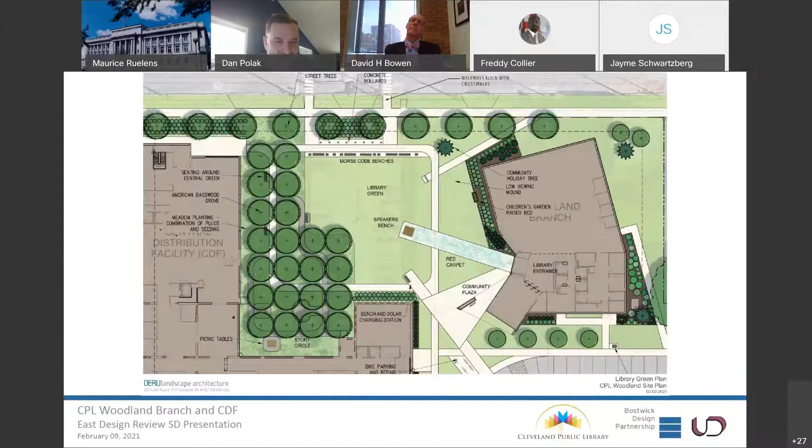Thank you. If we could go back to, I think it was the branch plan we were on. Or sorry, elevation, so we'll get into more of this. We have, I think, 5 updated renderings that we didn't have last time. The elevations are pretty simple. We wanted a consistent material. We wanted to create a campus feel, not necessarily through materials, but through spaces.

The existing neighborhood has a beige brick on our building. There's a dark brown brick across the street. The police station has something in between. We wanted to have something new that would kind of pop out, but we also wanted it to be, since it's kind of small, we didn't want to over design the materials on the building, and I'll explain that further on the next slides.

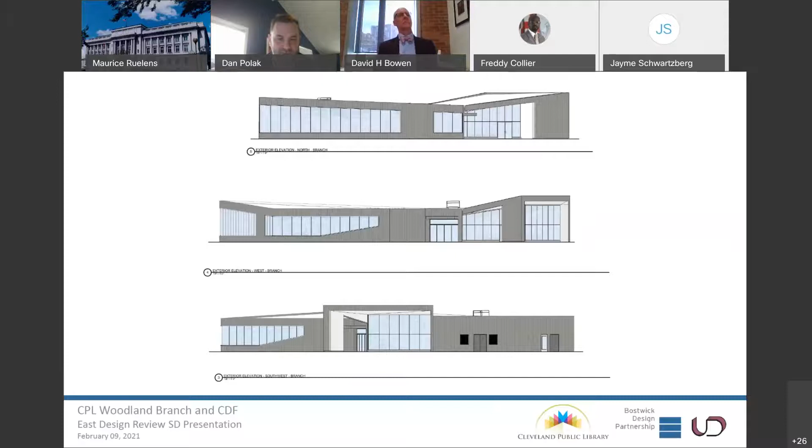The design concept behind that is this panel that wraps it keeps it really simple. The material has a little bit of shine and matte to it, so as you experience that down the street, we think it'll have a little bit of a glimmer to it, which will help make it pop. But we also made a consistent color choice and kept it simple because we do want the building to be timeless.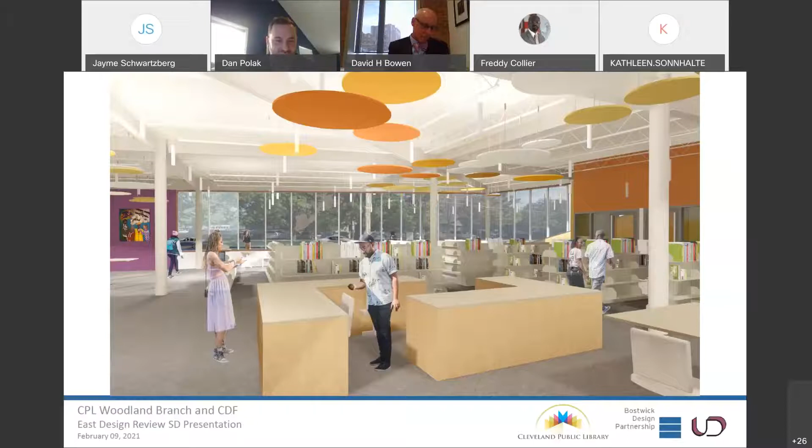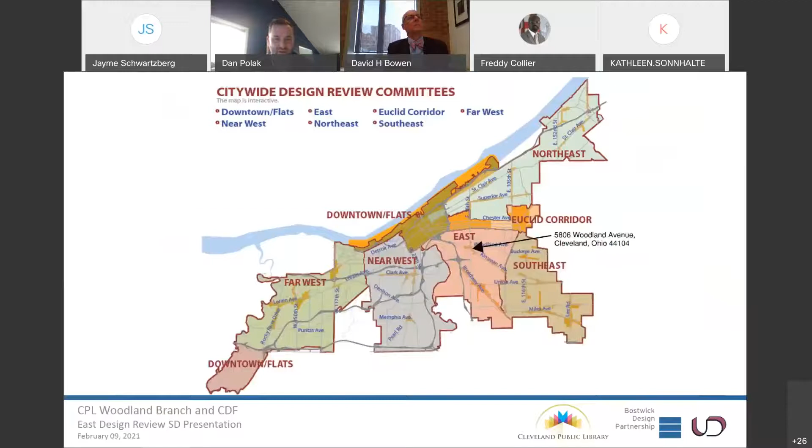And I think we'll take a look at the next slide. I think that was more of the background info. Yeah, you could go back to the slide before, please.

So I'll leave it here, and I thank you for your review and consideration. We are very excited about this project and looking to keep moving it forward. Again, we're seeking final approval, and if you did want to see any of the site stuff or go over that, we have that after this. We did review that last time, so if there's any questions or comments, thank you very much for your consideration.

This is Lillian. I said this before, I really like the design a lot. It's beautiful, and I thank you. And so I move for final approval.

Thank you, I second. Further discussion - I just wanted to reiterate what I said before. The Councilwoman texted me and she's in full support of the project. I think it's very attractive.

Are you there? Yes, I'm here. Councilwoman, go ahead. Thank you, thank you. I'm going back and forth between...

I just want to emphasize my strong support for this project. I think it's wonderful. I love the design, and I love the impact that it's going to have on the community with the community space, as well as the impact it's going to have on Woodland, which I think Director Collier mentioned is a very heavily traveled street in not just my community, but in the city of Cleveland. A lot of people travel from the east and east suburbs to get downtown by way of Woodland. So I just wanted to make sure to state on the record that I fully support this project, and I think it will be great for the community.

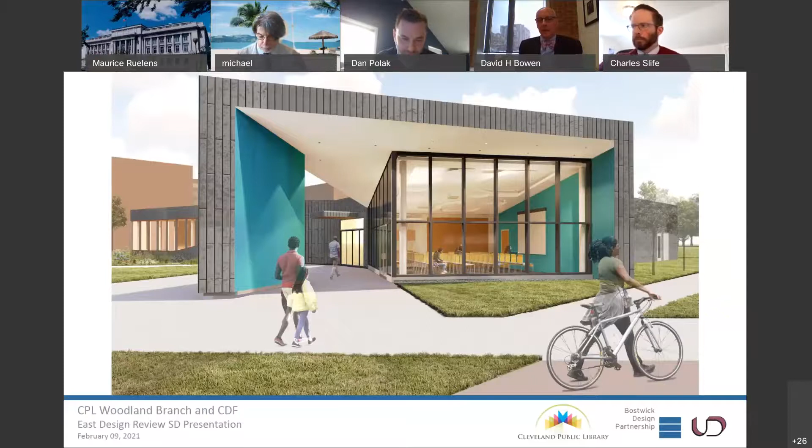Good luck, thank you very much, much appreciated. The next is Park Place Townhomes, new construction, seeking schematic approval.

This is on West 73rd Street. Who's here for this? Hi, it's Jeff Foster from Pato Architects.

I think Mike Marous will be with us as well. Can you start without him?

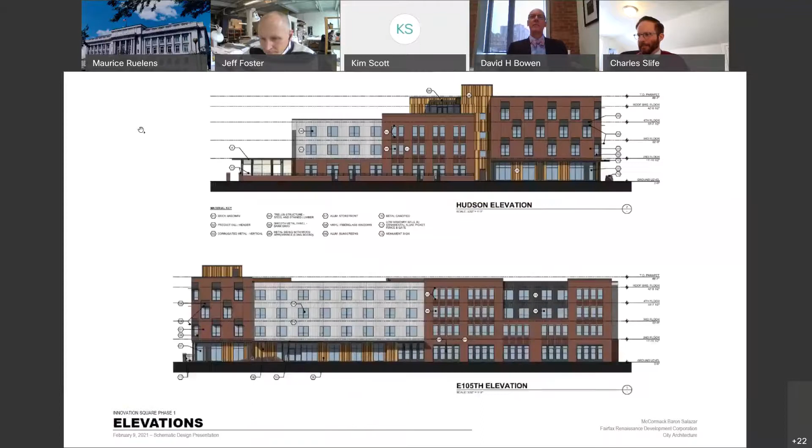I can. All right, can you raise your right hand? Do you solemnly swear to tell the truth, the whole truth, and nothing but the truth as you shall answer under the penalty of perjury? I do. Go ahead, okay, great.

This is a project at the Battery Park development. I believe you saw this a couple years back for a 5-story condo project that was planned. The development team has since changed directions on this, and we're looking at 25 townhouse units on this site.

There's Mike, I'm gonna let Mike do a little intro. Yeah, can you guys hear me? I'm sorry about that. Yes, we can. I'm going to have to swear you in if you don't mind. Yes. Please raise your right hand. Do you solemnly swear to tell the truth, the whole truth, and nothing but the truth as you shall answer under the penalty of perjury?

I do. Go ahead. Well, thank you everyone for taking the time today. You know, it's amazing to think back - in 2004, a lot of people thought we were crazy about buying the land over there at Battery Park, the old Eveready battery buildings. And I think all of us over the last 17 years have seen such a transformation to the community over there.

And, you know, I guess it goes back 17 years, and I just want to thank everyone because it was a big commitment by the city, Detroit Shoreway, our CDC. And it took everyone to kind of get there - the people that invested in our community early on, and it's really been an amazing run. We went through a subprime crisis, now we're going through a pandemic, but Battery Park never lost its momentum.

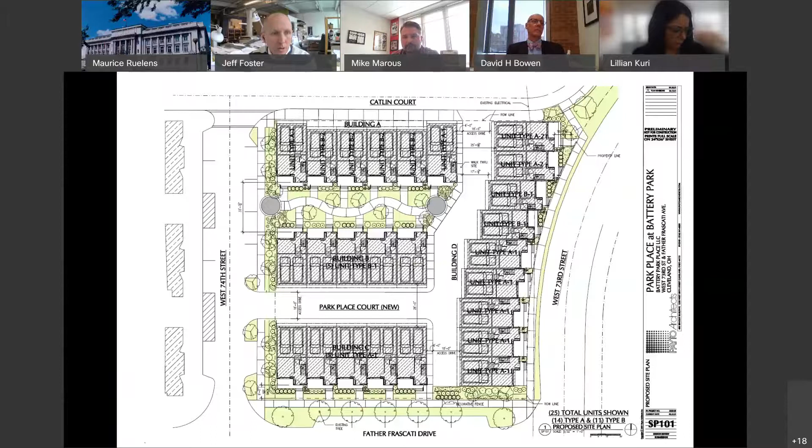Along each of those is a pedestrian access way. So you can walk down Father Frascati, our southern border for this development, and you'll see a sidewalk that runs up behind buildings D, connects through that landscape mews, and then exits up at Catlin Court to the north end. Flipping back to the next slide.

I mentioned the landscape plan, and I won't really go through this in detail. Even though we're here for a kind of schematic review, some elements of the design are pretty far advanced, so as you'll see, the landscape plan is pretty developed.

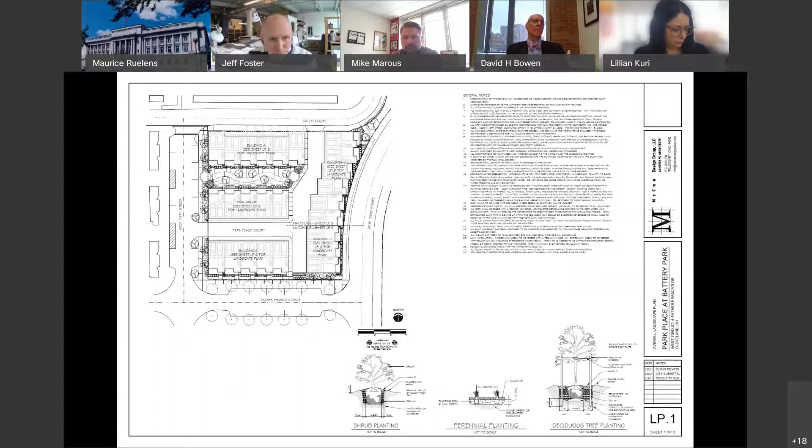Next slide. Lots of detail. Next slide. You can see some more detail on that interior landscape court.

Along 74th Street, we specifically made a switch to a connection that's currently there. Currently, working from 74th Street into the current site, you have on-street parking, which is existing, then a tree lawn, and then a sidewalk. We've reversed that and brought the sidewalk out to the edge of the parallel parking spaces, specifically putting our landscaping along the sides of those buildings along 74th. I wanted to point that out, as it becomes very apparent when we get to the renderings at the end of the packet. Next slide.

Our townhouse units, we have two typical units with a couple variations. This would be our larger 1,700 square foot unit. Each have rooftop decks, 2-bedroom units. Next slide.

Our smaller unit, which is the 1,500 square foot unit, same rooftop decks, but we also have the front porches you'll notice on these 3-story units. Next slide.

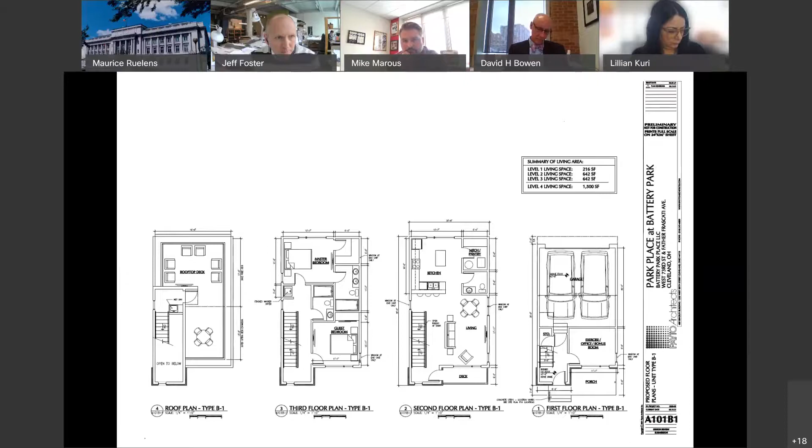So as you drive southbound, coming under the railroad tracks and heading uphill, you have a very prominent view of the stair towers as you come up, with the porches down below.

We integrated a sloped roof element, so you'll notice a variation on the facades between an L-shaped rectangular front and also a front that uses a sloped roof at the top. That was meant to give some drama to the ends of these buildings and a little dynamicism to the form.

That roof is a galvalume material, so it has a little bit of sparkle to it, but as it weathers, it'll weather to a nice even gray.

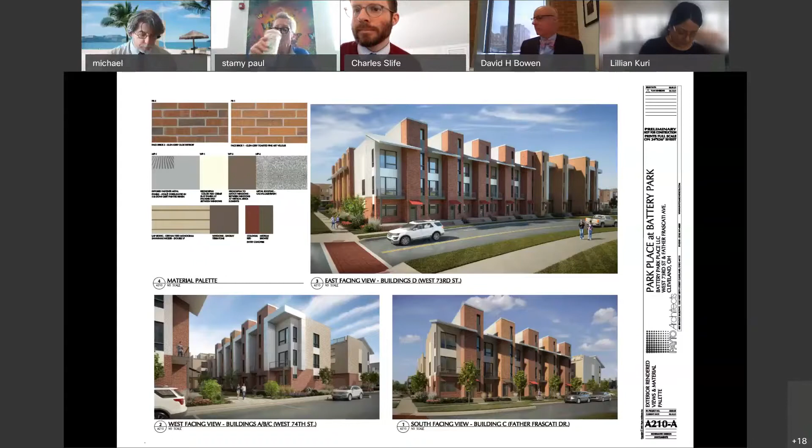Bowen, yes. Downing, yes. Fluker, yes. Kuri, yes. Paul, yes. Say it again - I saw his face, it froze. Charles? Yes, I am. Okay, I heard that. Thank you, all right, thank you. Good luck, Mike. Thank you, appreciate it. Thank you, have a good day and a nice weekend.

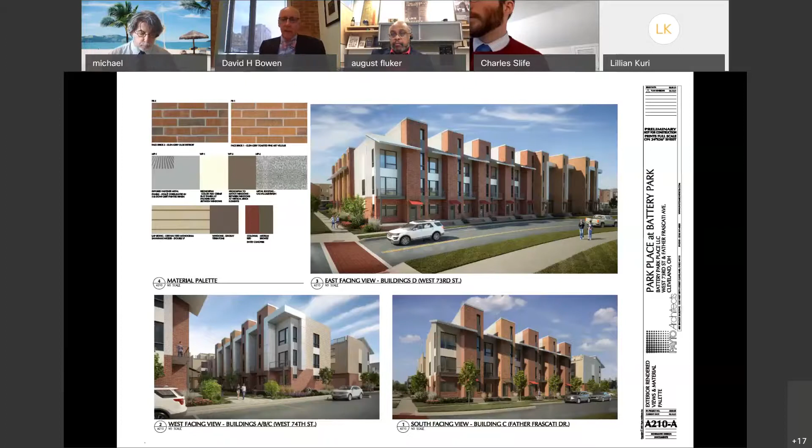You too. The last item on our agenda is the Buckeye Plaza freestanding sign seeking final approval.

So Mark is doing this? Who's here for this one? Mark, hello, are you doing this one?

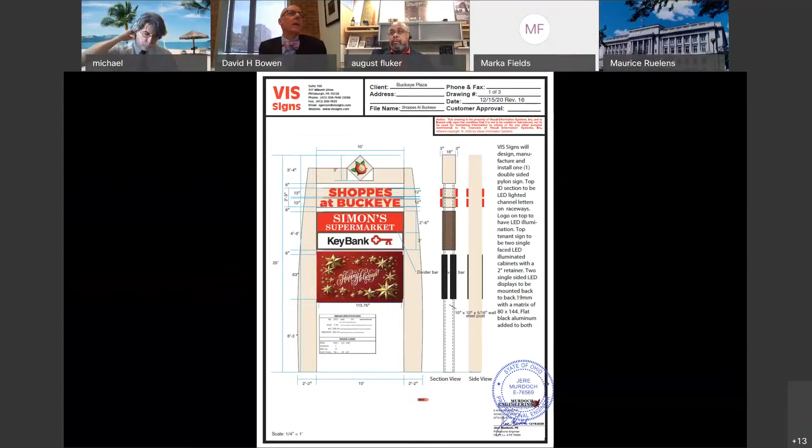Marka? I think we're having some technical difficulties. Yes. Hi, this is Marka, I'm on. Okay, yeah, I was here, I'm actually in this meeting and in NOACA's meeting, so it came up so quickly. Okay, multitasking, trying to - not very well, obviously. Okay, go ahead, did you already start to explain it, Fred? No, go ahead. Okay, yeah, we recognize it, obviously.

Yes, so this sign, of course, you've seen it before. It's coming back, and the reason is they wanted to include the KeyBank sign. They did not increase the sign area, but they did increase the height of the sign - it was initially 23 feet, now 25 feet. The additional 2 feet is to accommodate the logo at the center, and then the additional sign for KeyBank. So it just has to come back for approval of that additional sign.

All right, looks fine to me. Commission members?

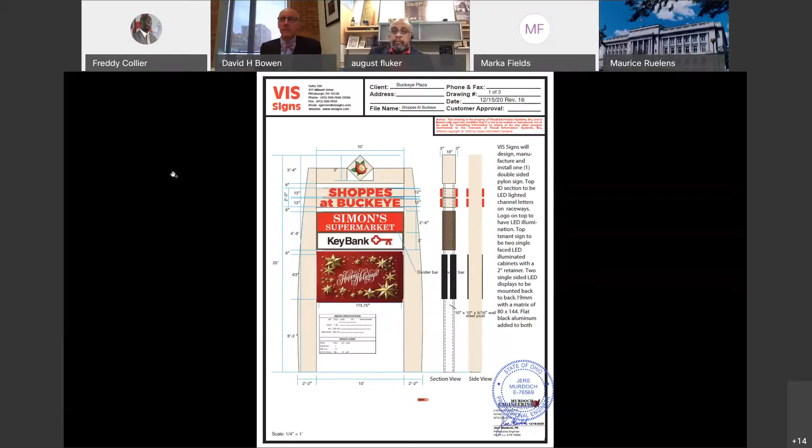I move to approve as presented. I second. We have a motion and a second, further discussion?

Call the roll, please. Bowen, yes. Diane, are you there? Yes. Fluker, yes. Slife, yes. Councilman, are you there? He might have dropped off, he may not be there. Okay, all right, motion carries.

Great job, Marka, you hammered that one home. Thanks. I didn't hear you, what'd you say? You hammered that one home, doing double duty. All right, thank you.

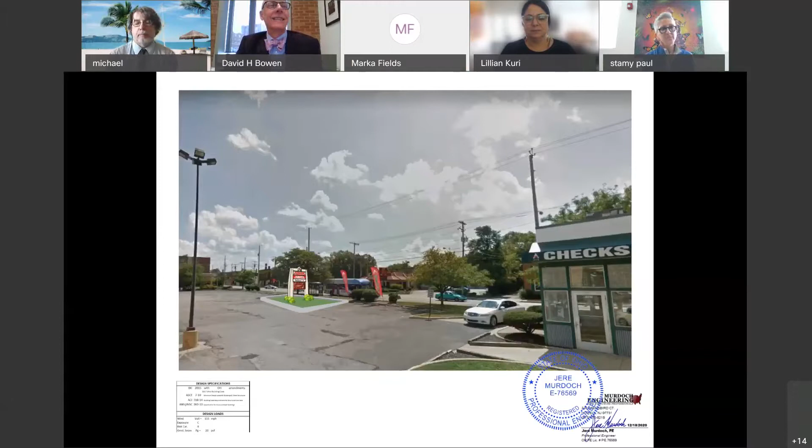Thanks, guys. Director, do you have a report? Just a quick comment about the upcoming symposium, wanted to make sure everybody has received the information and hopefully registered. Diane, I know we had some issues getting you the information, but you should have received it now, is that correct? Yes, I have. Awesome, that's great.

The other thing I want to mention, and I'm going to be candid, regardless of how things shake out this year from a political perspective, we all know and understand what our role is as a planning commission. The work we're doing with the symposium and the preparation for updating our comp plan is something we're required by charter to do, something we need to always focus on regardless of the political climate we're in.

I want to emphasize to the commission the obligation we have to make sure we are thinking and positioning the city for the future, and that this effort is a precursor to our comprehensive plan update, which we all know is important and needed. And I'm sure Ms. Kuri can recall who was responsible for my hiring back when we began the Connecting Cleveland 2020 citywide plan. That's all I have for today.